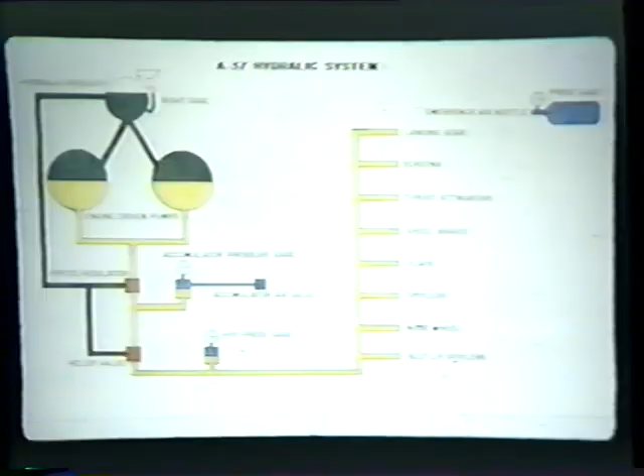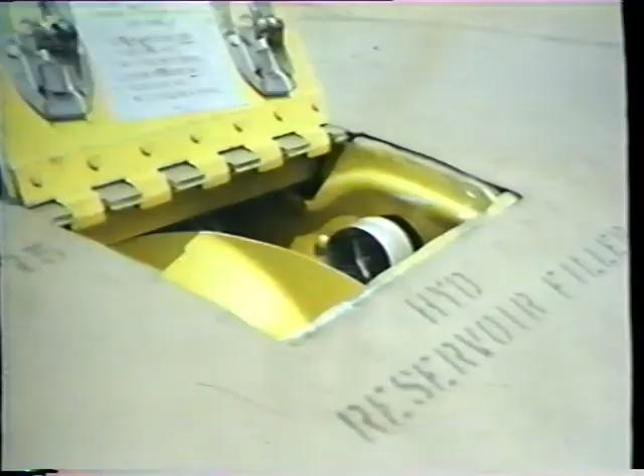One of the components of the 1.8-gallon hydraulic system is the reservoir, which holds the excess fluid. On each pre-flight, you should check the quantity and the pressure gauge. The amount on the sight gauge will be determined by the pressure in the accumulator. If you don't remember how to read the gauge, the instructions are printed on the service access panel.

On the instrument panel, adjacent to the engine instruments, is the hydraulic pressure gauge. It is calibrated from 0 to 4,000 pounds pressure. Normal pressure and maximum pressure are marked by a green band and red line to assist reading the gauge.

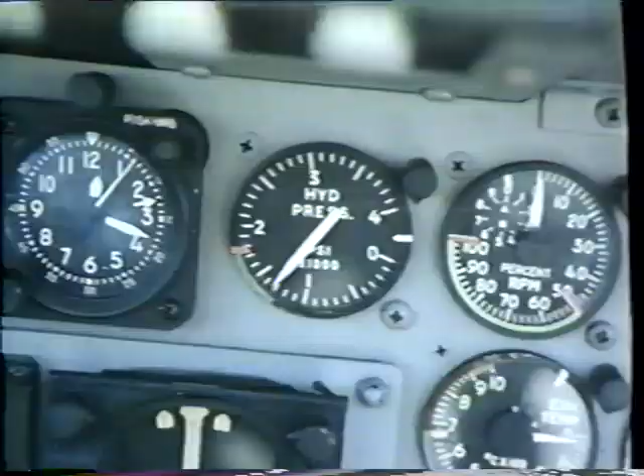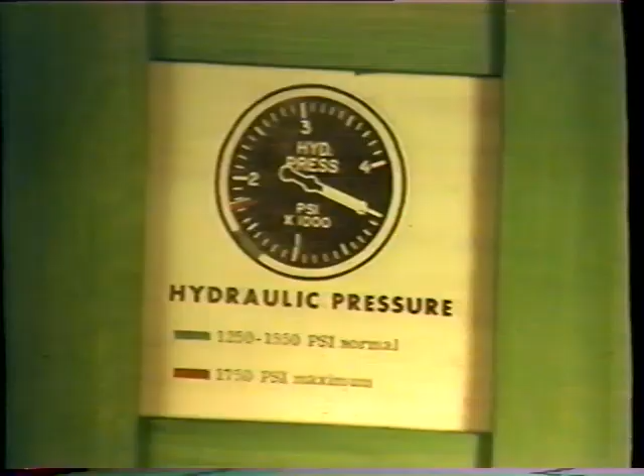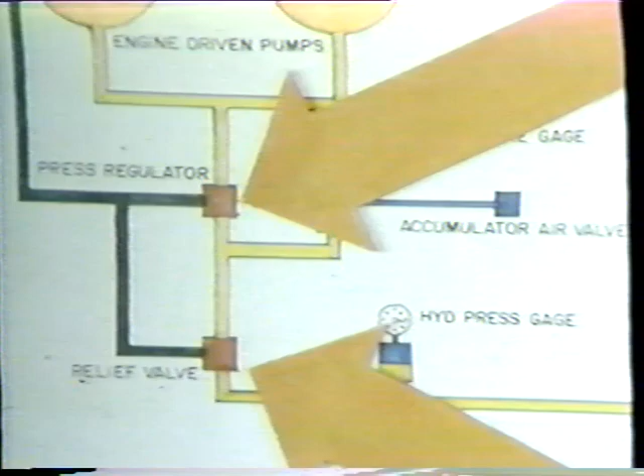The hydraulic pressure is maintained between 1250 psi and 1550 psi by a pressure regulator. The accumulator previously discussed absorbs surges in the system. Downstream of the pressure regulator is a pressure relief valve, which will release hydraulic pressure if system pressure reaches 1750 psi. A cockpit indication above 1750 psi indicates failure of the relief valve.

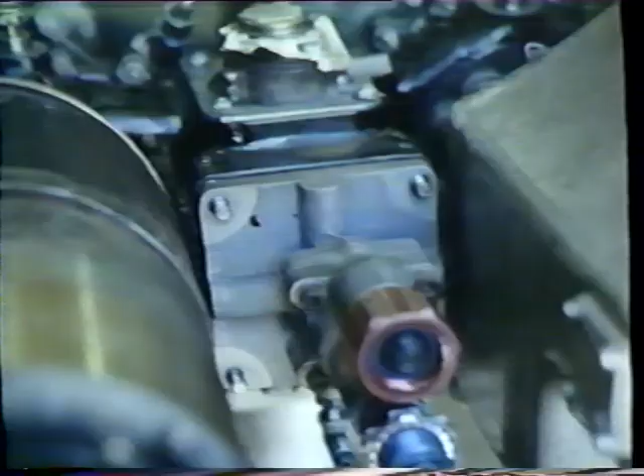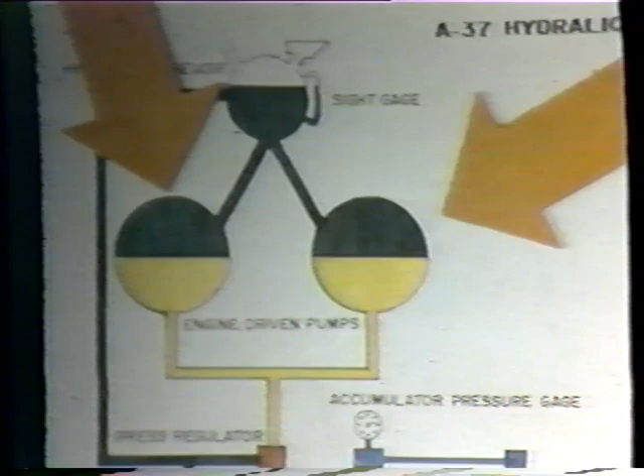The hydraulic pump, located on the accessory gearbox of each engine, is capable of supporting the entire system. There is a slight increase in time required for operation of some components with single-engine operation. As the pilot, you have no control over the hydraulic pump. It operates whenever the engine is turning.

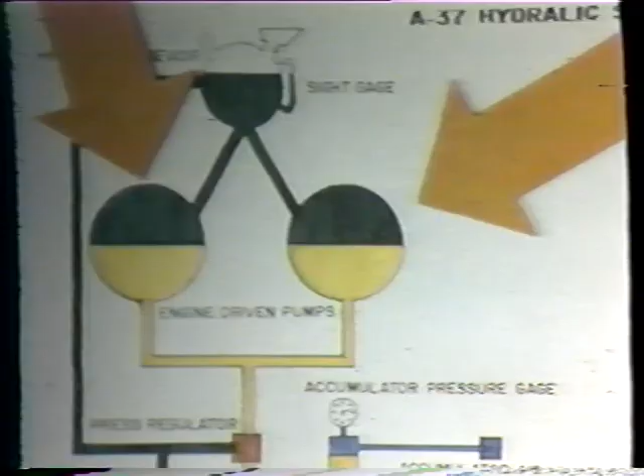A low hydraulic pressure indication may or may not indicate failure of the hydraulic pump. Also, one hydraulic pump could fail without any cockpit indication. To detect a single pump failure, the hydraulic pumps are checked on each flight in the following manner.

The left engine is started first, and the hydraulic pressure is checked. This way, you are assured that at least the left pump works. At the end of the flight, the left engine is shut down first, and the right hydraulic pump is checked. By using this procedure, each flight may be begun, knowing that on the previous flight, both pumps were operating normally.

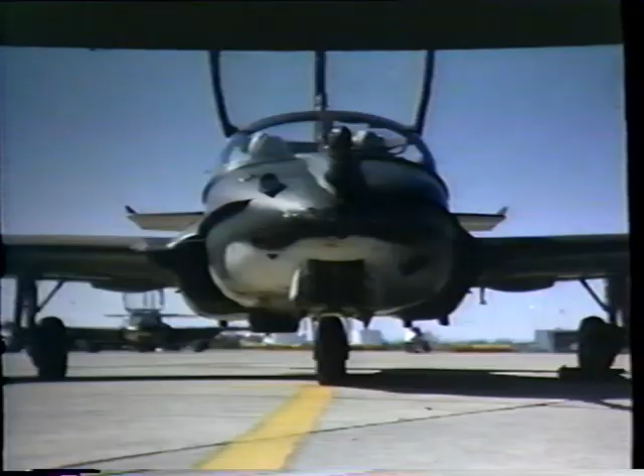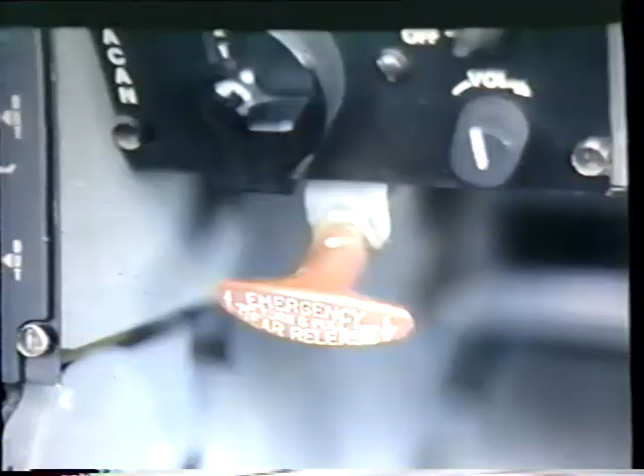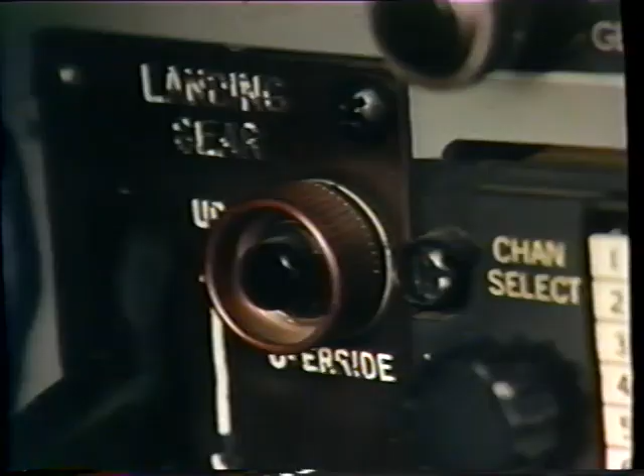The landing gear is the most important hydraulic component of the A-37. As such, it is the only hydraulic component with a backup system, which will be discussed in a few moments. The main components of the gear system are main and nose gear, gear doors, gear handle, emergency gear T-handle, the blowdown bottle in the nose wheel well, emergency retraction system, and down and lock indicators.

The pneumatic air blowdown bottle is located in the nose wheel well of the aircraft. However, a gauge indicating bottle pressure is located in the gun bay for ease of viewing during pre-flight. The gauge should read 2000 psi plus or minus 250 psi. If not, have it serviced. Less pressure could prevent a successful emergency gear lowering.

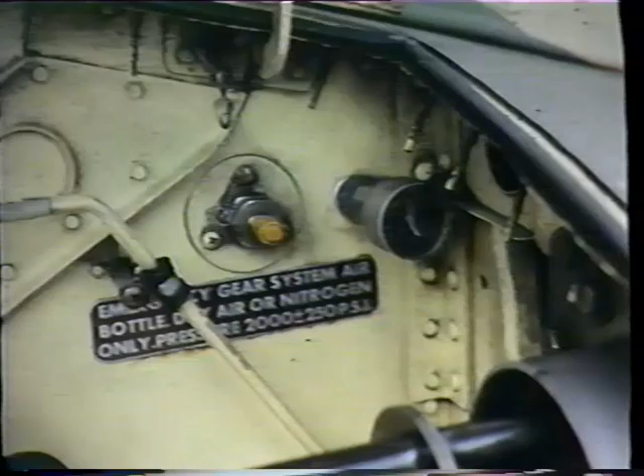On the ground, the gear is held down by over-center locks on the struts, which are held in place by hydraulic pressure. In addition, gear pins are installed when no hydraulic pressure is available. When aircraft weight is on the right main gear, the gear handle solenoid is de-energized. The solenoid will retract only when aircraft weight is taken off the right main gear or the landing gear emergency override switch is pressed.

When the gear handle is raised to the up position on takeoff, a red light in the handle will illuminate until the gear is up and locked. Care should be taken not to exceed the absolute maximum gear speed of 170 knots indicated prior to the light going out. With normal pressure, gear retraction time is approximately 10 seconds. Lowering the gear takes about 8 seconds.

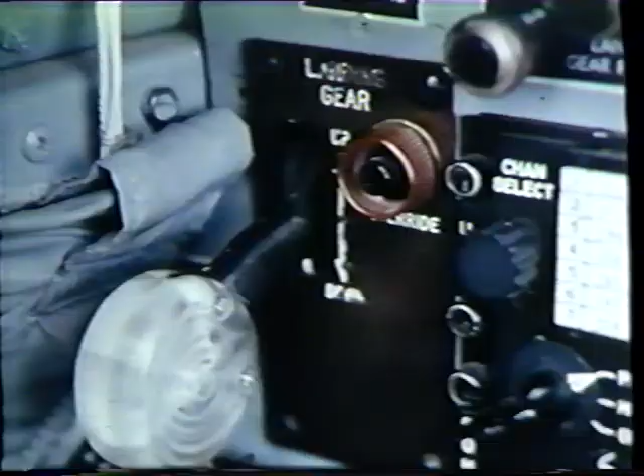The light in the handle will be on until the gear is completely up and locked or down and locked. Lowering the gear handle starts a sequence of events. Study this sequence.

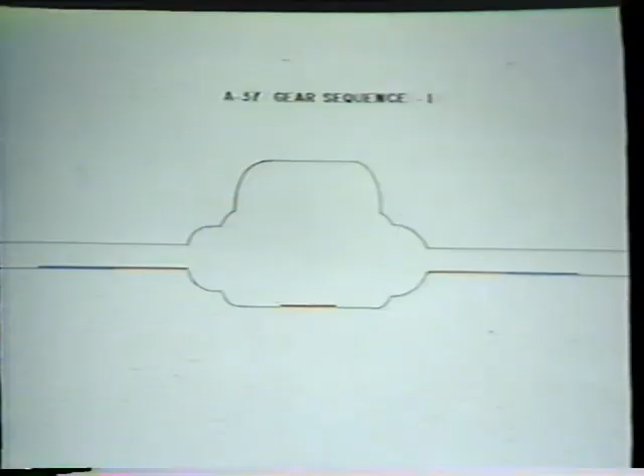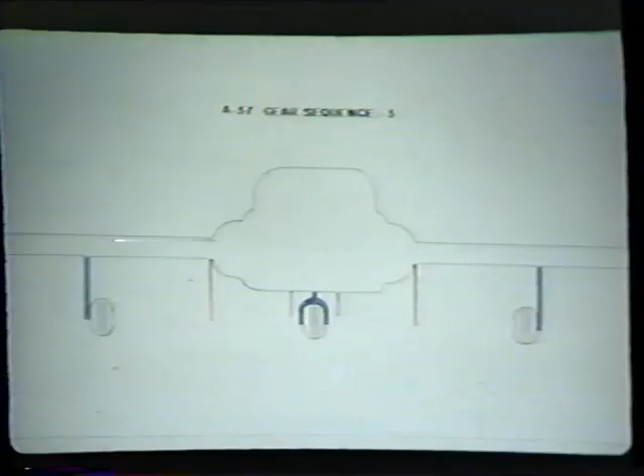Lowering the gear handle mechanically unlocks the nose gear and nose gear doors and positions a selector valve. This hydraulically moves main gear doors and the nose gear down. Once the main gear doors are fully open, an electrical switch is tripped, which positions a hydraulic valve to drive the main gear down.

As the main gear reaches the full down position, it trips another electric switch, which positions a valve to close the main gear doors. The nose doors remain open. The sequence is reversed for raising the gear.

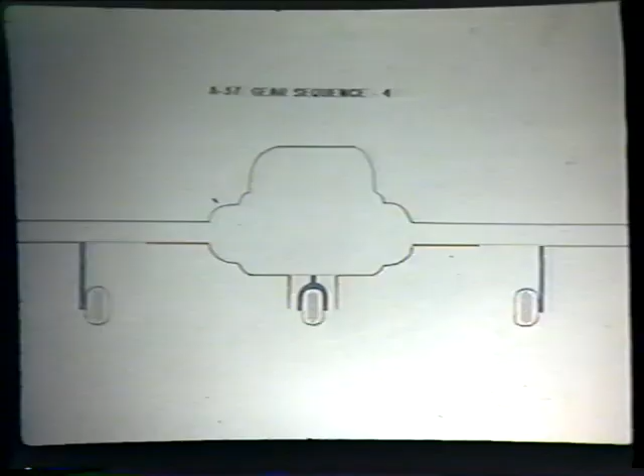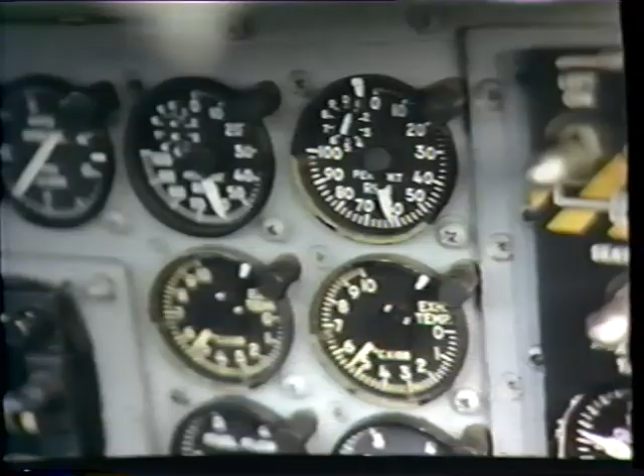The gear warning light and audible tone will occur anytime the throttles are between idle and 60 plus or minus 3%, and the gear is not down and locked. The warning system is designed to prevent gear-up landings. A knowledge of the normal sequence is essential to determine appropriate action should a malfunction occur.

In the event of hydraulic failure, the gear may be lowered by using pneumatic air pressure to blow the gear down. The gear handle must be in the down position to prevent damaging the aircraft by a 2,000-pound surge entering the reservoir.

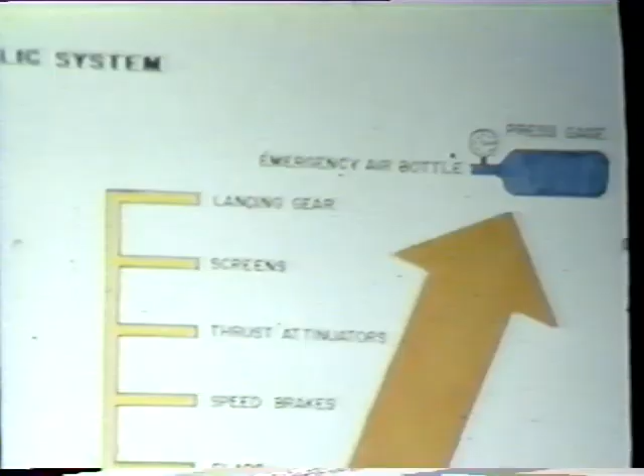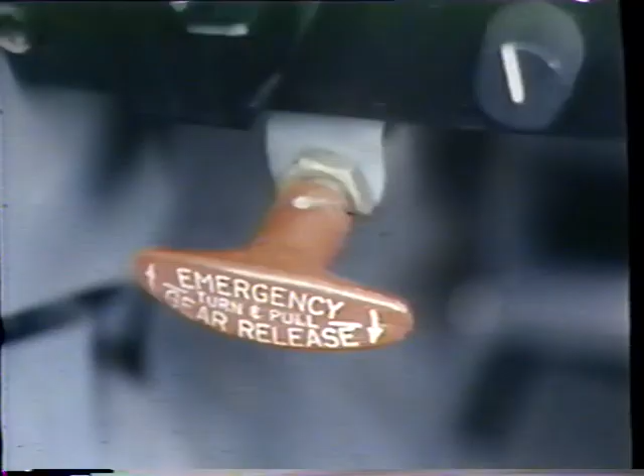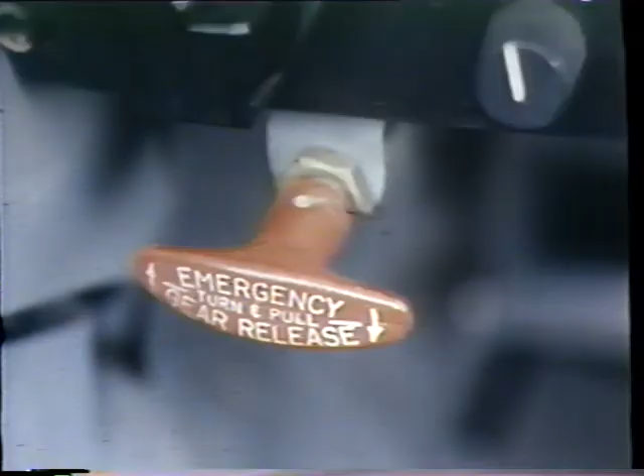If the handle cannot be lowered, attempt lowering it using slight negative G. This should free the handle. Once the handle is down, the emergency gear lowering T-handle may be turned and pulled. Continue to hold the T-handle until the gear indicates down and locked. Once the gear has been lowered by this method, do not raise the gear.

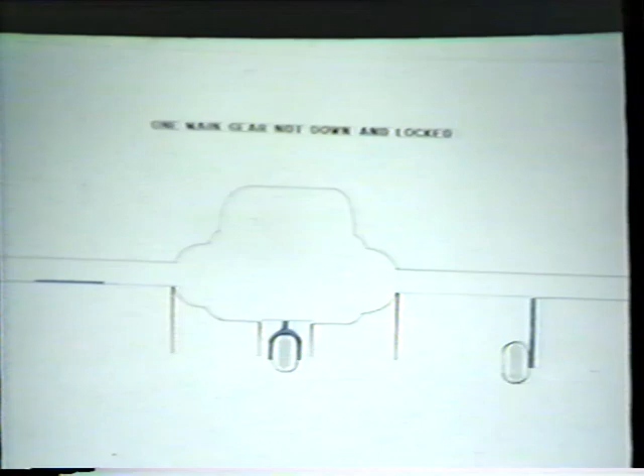In case one or both main landing gears remain retracted when the landing gear handle is placed in the down position and hydraulic pressure indicates normal, an electrical malfunction may exist. This electrical malfunction is in the gear sequencing circuit. With the gear handle down, pull the gear sequence circuit breaker, or turn off the battery and generators for 15 seconds. Then restore power.

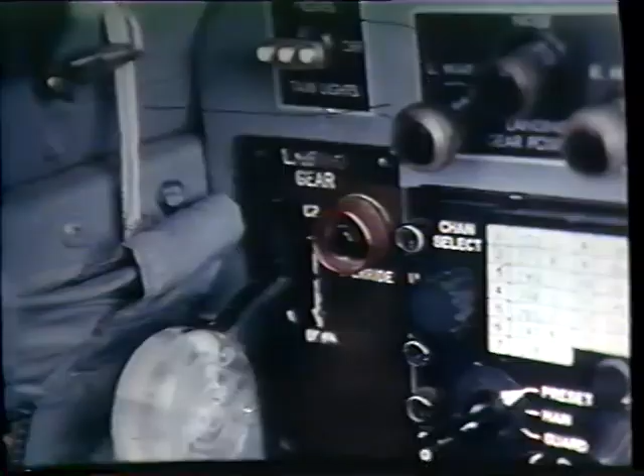To avoid a collision with a ground obstacle, the gear may be retracted in an emergency by simultaneously pressing the landing gear override button just to the right of the gear handle, and raising the handle to the up position. This will override the downlock solenoid and allow the gear to retract on the ground. This is a last resort procedure and should only be used if stopping distance is critical.

You must have both hydraulic and electrical power to retract the gear on the ground. Keep in mind that the override button must never be used to raise the gear in flight. If the gear won't come up, leave it down and land.

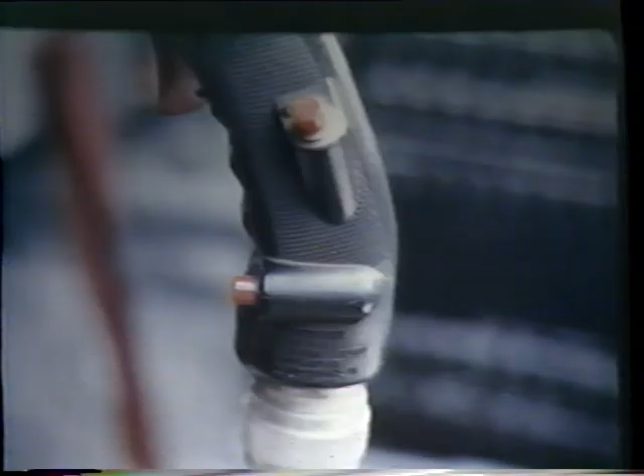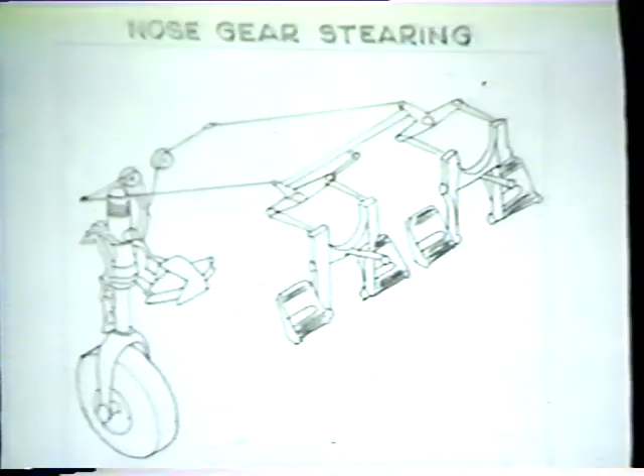Pressing and releasing the nose wheel button engages the nose wheel steering. The nose gear steering unit is activated by movement of the rudder pedals through a mechanical linkage to the nose gear steering unit. Pressing and releasing the button the second time disengages the system. The system will also disengage automatically at takeoff, as weight is taken off the nose gear. You should, however, disengage it as soon as the rudder becomes effective on takeoff.